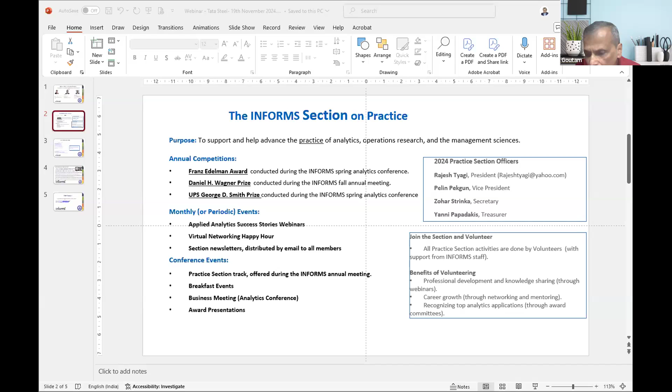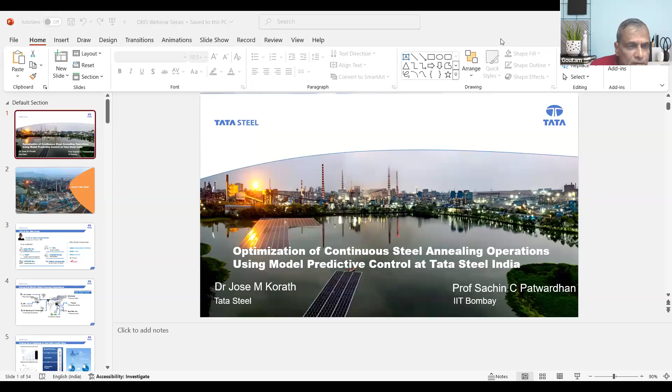Thank you, Professor Datta. So I'm just, yes, I think I can share. So it's not. Yes. Is my screen visible? Yes, screen is visible to me, at least. Yeah, it's visible.

Good evening and good morning, everyone, and welcome to this presentation on optimization of continuous steel annealing operations using model predictive control. With me is I'm Jose Korath from Tata Steel, and with me is Professor Sachin Patwardhan. We'll start with a brief introduction of the Tata Group and Tata Steel and the business context within which we operate. Also, the strategic significance of the automotive steel market segment. Then we'll go to the project details.

About Tata Steel: it is part of the Tata Group, one of the most diversified groups in the world and most well-trusted group, with an annual revenue of about 150 billion US dollars. We have about 30 listed companies and many other non-listed small companies. These are the key group companies: Tata Consultancy, Tata Steel, Tata Motors, Titan, and Air India.

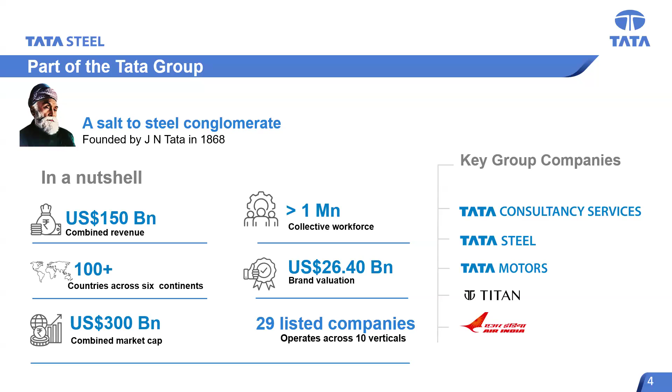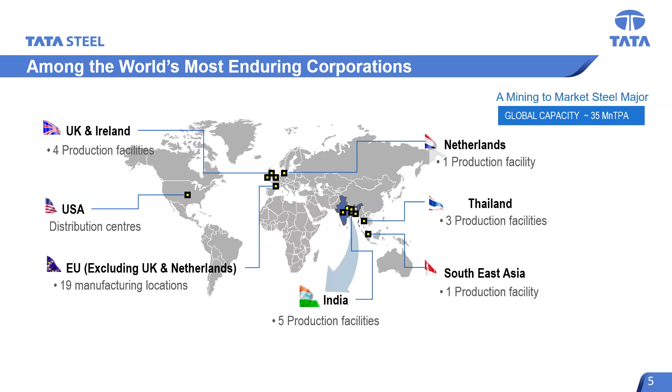Tata Steel is the flagship company of Tata Group, and it was established in 1907 in India. Now we have operations in India, UK, mainland Europe, and the Americas, and also in the Far East in Thailand. In India, we have got 5 integrated steel plant facilities, and we are a mine-to-market steel major, having the entire value chain starting from mining to finished product.

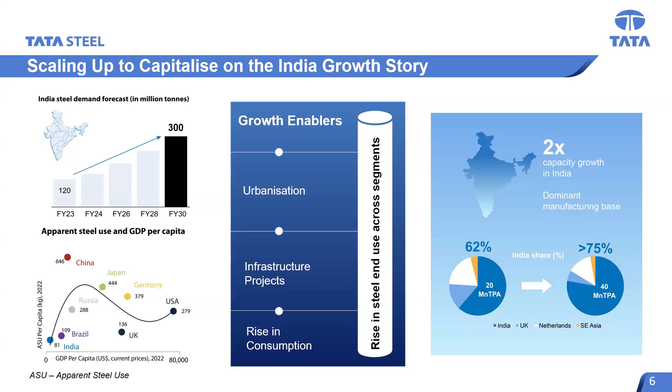If you look at the steel industry in India, as we know, the Indian economy is growing rapidly, and is primarily powered by the growth in infrastructure projects and other aspects of urbanization like automotive, housing, etc. So this is a big opportunity for consumption of steel, and it is estimated that by FY30, the Indian steel demand will double to almost 300 million tons per annum. So Tata Steel is also planning to capitalize on this opportunity, and our plan is to double our capacity in the coming 5 years. By FY30, we'll become 40 million tons in India from the current 20 million tons. That plan is under execution. So that is the overall broad context.

Coming to automotive steel: among the steel market segments, the most premium one is automotive. At the same time, it is the most competitive, with very well established and stringent global standards for its quality and supply chain requirements. Most of the steel used in automotive is cold rolled and annealed. If you take a car, typically 60% of the components are made of cold rolled and annealed steel. So it's needless to say that the quality of the steel is very important for the safety and durability of the car. That is the context in which this project assumes significance.

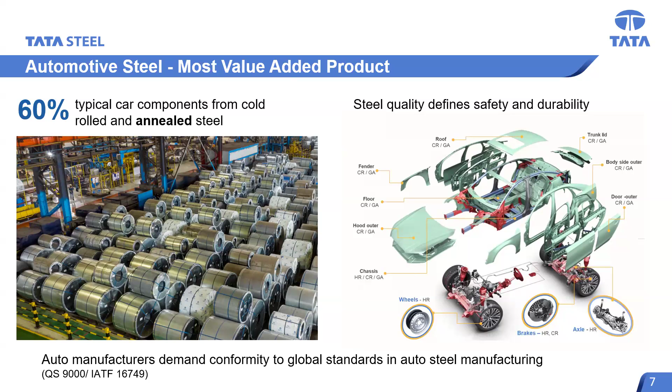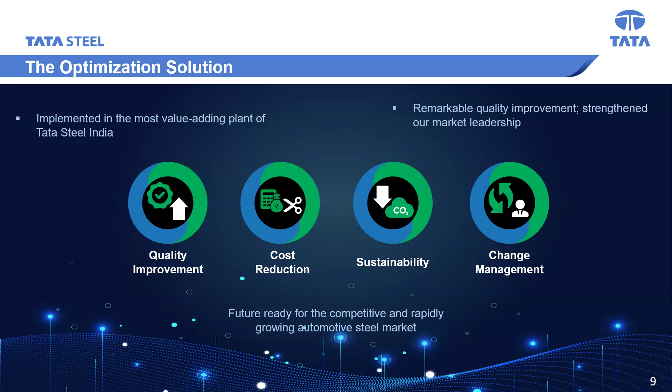So we have tried to optimize the annealing operation in an integrated steel plant. The objective is to get a smart decision-making solution for an annealing line, so that the product comes out with consistent quality in a fuel-efficient, cost-effective manner. This has been implemented in the most value-adding plant of Tata Steel India, and the quality improvement we got is remarkable. It has been a very big, great change management story as well.

So before I get into the project details, to familiarize the audience with the steel manufacturing process, we have prepared a 2.5 minute video. I would request you to go through this.

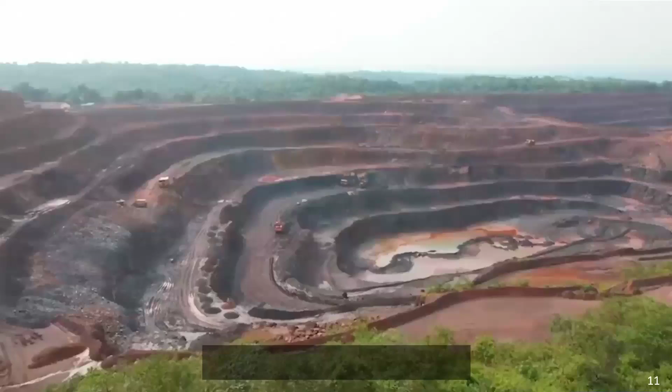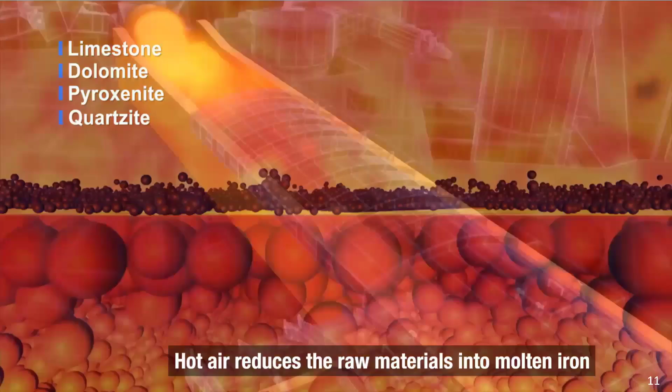Let us understand the various steps in Tata Steel's integrated steel making operations. A mining-to-market steel company, Tata Steel's value chain begins at its captive iron ore and coal mines with the extraction and preparation of iron ore and clean coal. Inbound logistics transports raw materials from different locations to the steel works. Coal is converted into metallurgical coke and iron ore into pellets and sinter before they are charged into blast furnaces. Hot air reduces the raw materials into molten iron, while impurities called slag float to the top.

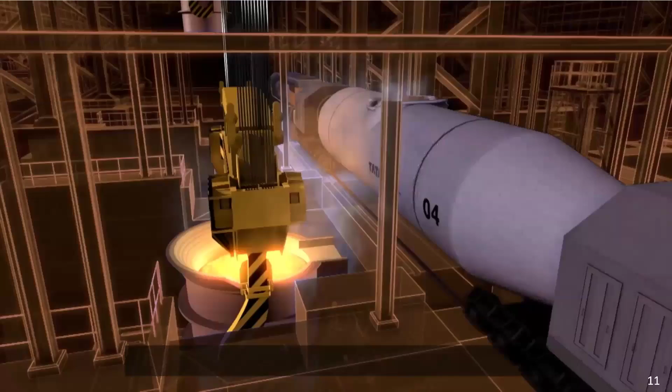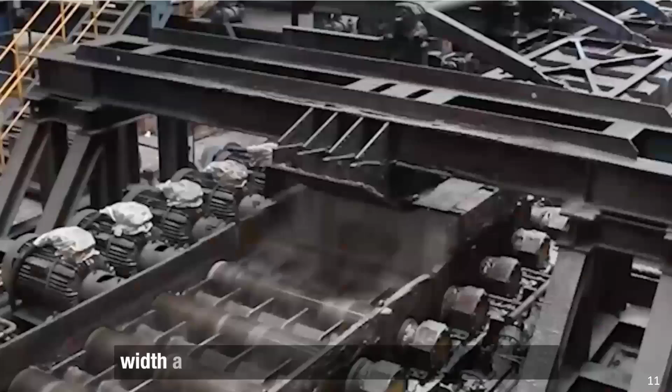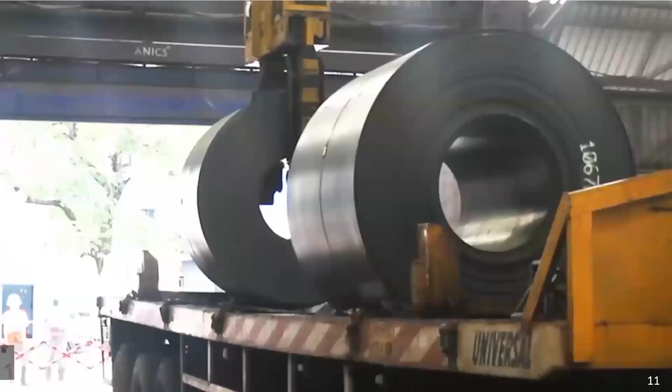The hot metal is collected in a torpedo which transports it to the steel-making shop. Here, it is tipped into a transfer ladle, which carries the hot metal to the steel converter. In the converter vessel, high-purity oxygen is injected via a lance to refine the hot metal into steel. Liquid steel is then transferred for casting into solidified slabs, cut to the required length and sent for hot rolling. After being reheated, the slabs are rolled into the required length, width and thickness as per the production schedule. The hot rolled strip is then passed under laminar cooling to achieve the desired mechanical properties. Thereafter, this strip is further wound into coils of almost 1 kilometer length. It is then strapped and marked for the customer before being sent to the coil yard for dispatch.

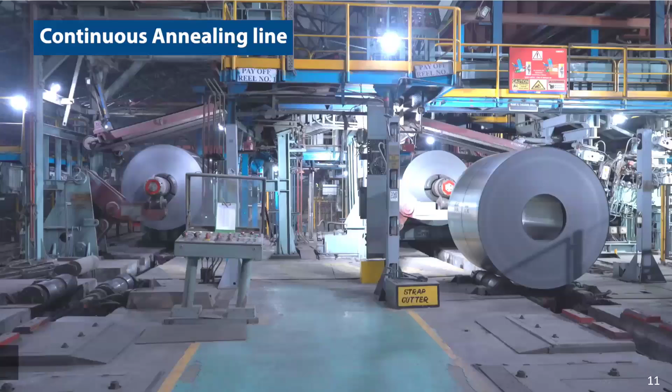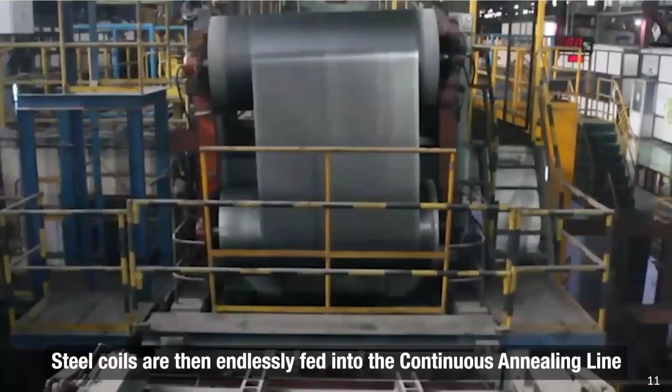Steel for automotive applications is sent to the cold rolling mill for value addition. Here, hot rolled coils are pickled and rolled to create cold rolled sheets, which make the steel hard and brittle. To make automotive steel ductile and formable, it must undergo reheating in a process called annealing. The focus of the current project is on this annealing process. At the continuous annealing line, successive coils are continuously welded to maintain continuity across the line. Steel coils are then endlessly fed into the continuous annealing line. In the annealing furnace, the steel strip is reheated to a target strip temperature to allow the strip to regain mechanical properties that make it ductile and formable.

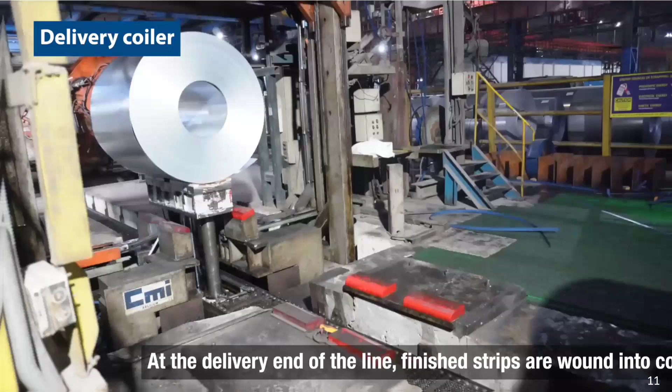After the annealing process, cold rolled sheet is galvanized in a zinc bath to provide protective coating against corrosion and acquire surface finish. Every inch of strip surface is inspected and tested for the desired mechanical properties. At the delivery end of the line, finished strips are wound into coils, packed and strapped with the help of robotic machines. Packed coils are stored in yard and dispatched by road and rail as per production plan.

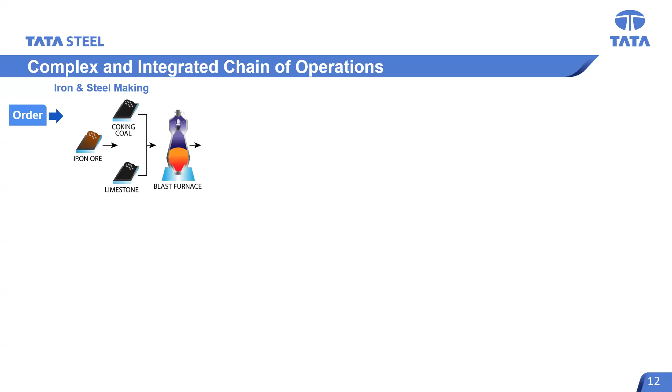As you would have seen in the video clip, the manufacturing supply chain of an integrated steel plant is fairly complex, given the variety in the physical, chemical and thermal processes involved, apart from the enormity of the logistic operation. This slide captures it schematically.

So we have a huge product basket, starting with the same liquid hot metal. We make about 300 grades of steel slabs, and from there about 800 grades of hot rolled products. From that hot rolled coils, some part goes into the market since they find direct application, and the remaining part goes to cold rolling and annealing line. There, in the cold roll and annealing segment itself, we have about 1,100 SKUs.

So with such a macro and micro level complexity in the supply chain, to meet on-time delivery commitment to our customers, we use a very well-established, robust, at the same time flexible framework for production planning through the value chain. We use advanced SCM platforms like BY, etc., to have the production planning. That is the first level of decision making. The second level of decision making needs to happen at individual unit process, whether it is steel making, rolling, casting, or annealing. So that also equally needs to take care of the specificities, the constraints of that particular unit operation.

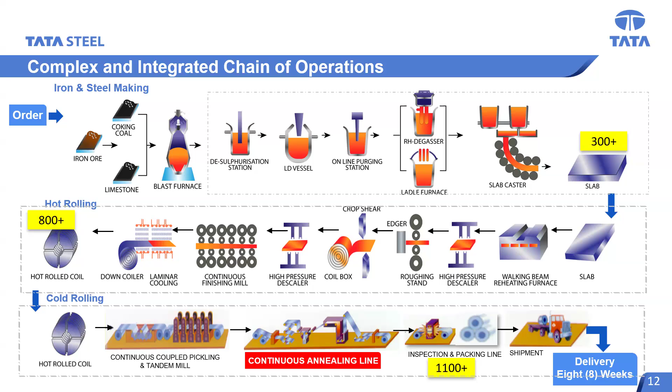Here in this project, we developed an optimization solution for the highly value-adding finishing operation called continuous annealing, which is very critical to quality, especially for the premium automotive steel segment. Let me use a pointer first.

So we'll just go to the problem. So why is annealing required?

When we cold roll the steel, we are reducing the thickness by applying pressure and force. That leads to rupture of the internal grains, the crystals of the steel, and the deformed structure has a lot of internal stresses generated in it, making it brittle. With that brittle steel, we cannot do any forming application or make any shapes by forming operation.

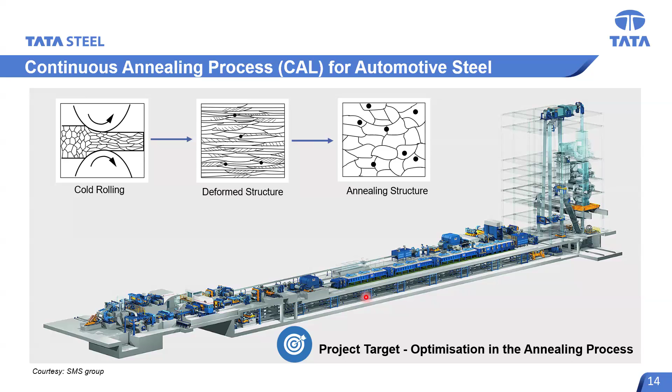So in order to recover the formability or ductility of the steel, we need to subject it to a process called annealing, where recrystallization happens - stress-free equiaxed grains take a kind of rebirth from the deformed structure. This is achieved essentially by heating the steel to a particular target temperature where recrystallization happens. There are many technologies for annealing, like batch annealing, but the most modern one is the continuous annealing line, especially for producing premium steels used for automotive applications.

Now this is a schematic of the continuous annealing line. Typically the CAL consists of a number of unit operations connected and operated in tandem. The steel coils are unwound and fed continuously to the line, one after the other, with the tail of one coil getting welded to the head of the next coil. It passes through a surface cleaning unit first and then enters the furnace where it gets annealed.

It is followed by post-processing like metal coating, which is optional - some lines do not have a zinc coating. Then a single stand rolling which gives a mild elongation, and it gets wound on a winding reel, ready to dispatch.

If you look at this line, there are two things we need to keep in mind. One is the tightly coupled nature of the line - a disturbance in one unit can easily lead to a disturbance in the other, a kind of domino effect. The other aspect is the varying scales of dynamics of different units.

Some units are very quick to react. For example, the rolling mill - if I apply a change in the set point, it will react very quickly. Whereas a unit like the furnace, which has very high thermal inertia, is very slow in response. So this variability in scale poses a challenge in controlling the connected line in a smooth manner.

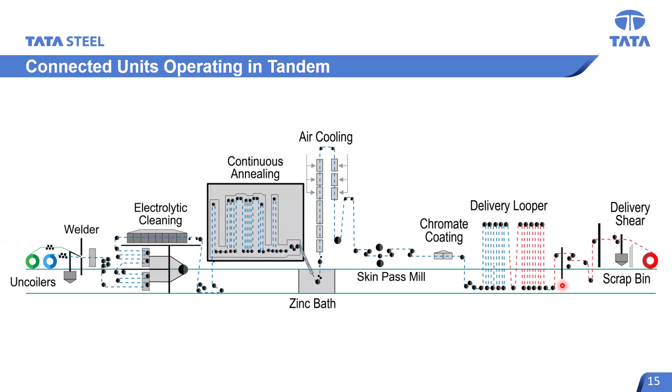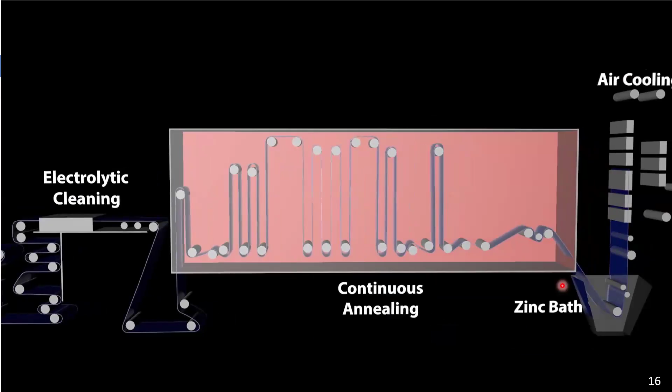Okay, this being a schematic, just to get a feel of how the line looks, it's a small animation we have made. You can see the uncoilers, coils getting unwound and entering the furnace, then the coating line. It goes through different storage buffers and finally gets wound off. This is always in motion - at steady state it will look like this, continuously being fed from the entry side.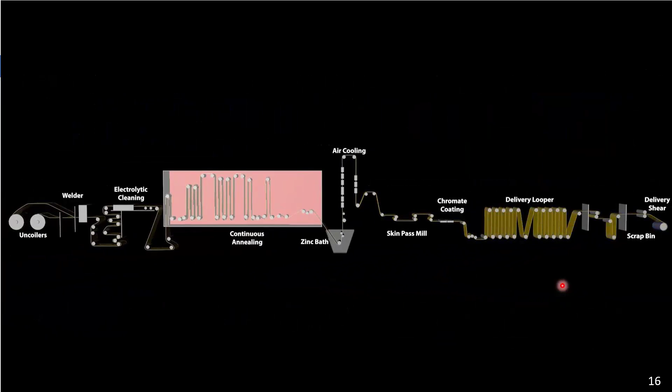So let us have a closer look at the annealing furnace. That is the unit where we are applying our optimization solution. Let's look at the anatomy, the scale and complexity of the furnace.

The furnace is nothing but a rectangular heating chamber with temperatures increasing along the length. A steel strip passes through the furnace, and as it passes through, it gets gradually heated up to a specified target temperature. The basic heating element inside the furnace is the radiant tube, shown here as these red boxes, and it's blown up here too - this is the structure of a radiant tube. The gaseous fuel burns inside this radiant tube, and that in turn heats the radiant tube surface, and the heat radiates from the surface to heat up the furnace ambience, and the strip gets indirectly heated up.

Why do we adopt such a methodology? An open flame will contaminate the steel surface, whereas this method prevents that contamination. So it is an indirect heating.

We have about 150 plus radiant tubes inside the furnace. These radiant tubes are grouped into different zones for the purpose of controlling the furnace temperature profile. By regulating the fuel flow into the radiant tubes in each zone, we can control the temperatures in each furnace zone, which in turn affects the strip temperature. The operator gives the desired temperature set point for each zone, and lower level controllers regulate the fuel flow accordingly.

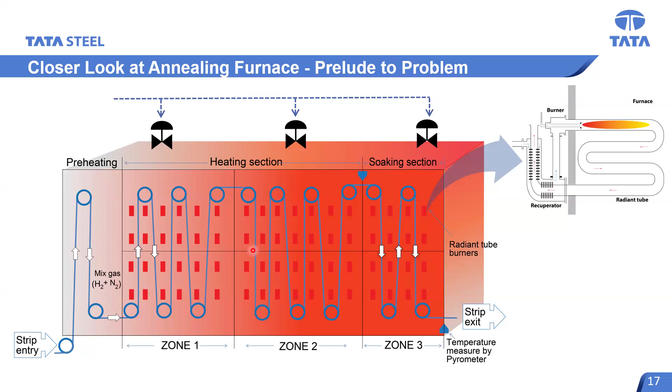Now, where does the suboptimality arise from? The first problem, we saw the slide depicting the complex supply chain. We saw that the wide variety of products we make through the same line means we will have a lot of transitions - coil after coil coming to the annealing line will not be of the same type. Given the delivery requirements, we will have a lot of variation transitions as part of the daily planning. So it's an intrinsic characteristic of the supply chain.

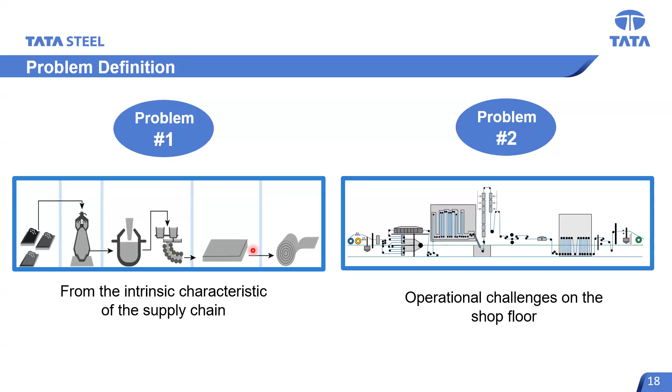The second one is the operational challenges from the shop floor, the plant disturbances. We will have a situation where the leading coil has a target temperature of 800 degrees to be met once it passes through the furnace, whereas the trailing coil has a target temperature of 700 degrees, because that is the temperature demanded by that particular grade for it to achieve recrystallization.

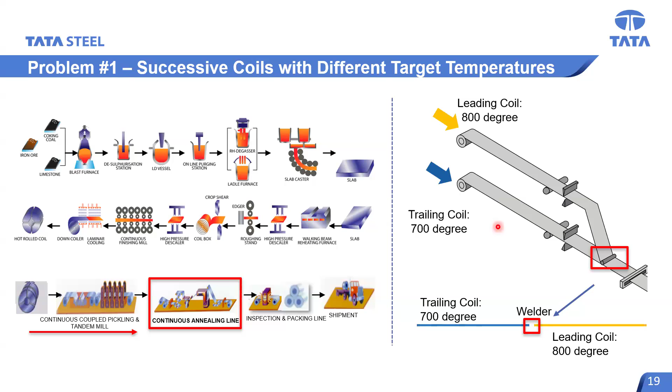So this transition - we need to manage it without over-annealing or under-annealing as they pass through the furnace. This requires dynamic management of the furnace temperature profile so that leading and trailing strips are heated correctly and meet their respective target annealing temperatures with minimal deviation during the transition. Given the furnace inertia, there will be some underheating or overheating, but how well we can minimize it with a smart decision tool - that is the challenge. This just shows how the welding is happening one after the heads and tails.

So this is the other problem. Suppose there was some problem in the welder - the welding, which is supposed to finish in say 30 seconds, took slightly higher time, 45 or 50 seconds. That impact will be felt in the furnace, because we have to stop the line while welding is happening. The coil in the furnace will get overheated. In this kind of scenario, the furnace needs to respond with adjustment of the temperature profile to reject these kinds of disturbances most effectively.

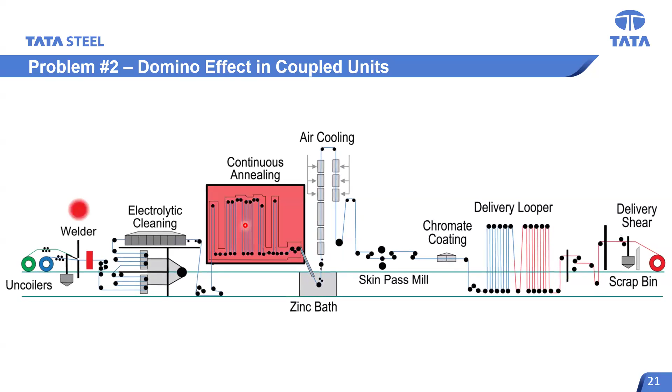For the past 20 years, this has been done by the operator at the desk - his wisdom, his experience, his skill comes into play. Sometimes both grade transition and line disturbance happen together. So it's this legacy practice of adjusting manually that results in suboptimal decisions.

For example, in a typical case, the operator will be responding to different calls from the entry side and exit side, adjusting the set point. So there is a lot of room for getting panicky for an average operator on a daily basis. This legacy practice to handle both problem scenarios mentioned above was to adjust furnace operation set points manually.

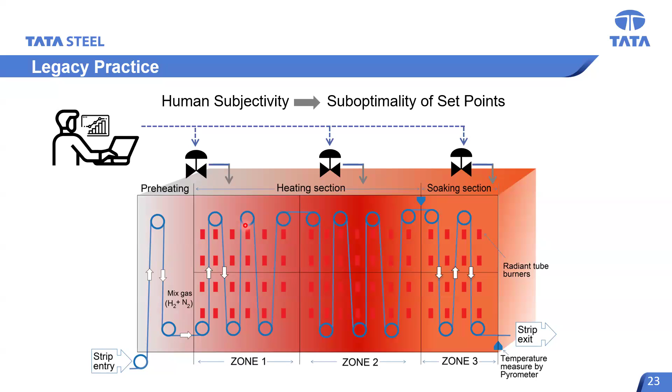So what is the impact of this manual operation? We salvage the scenario, but how severe is this suboptimality? One is improper heating of the strip - either overheating. As the picture shows, the leading coil is 800 and trailing coil is 700, so there is a good chance of overheating the trailing coil, which in turn leads to over-softness and more fuel consumption.

Here it is a case where if I try to reduce that, there is a chance of bringing down the furnace temperature early.

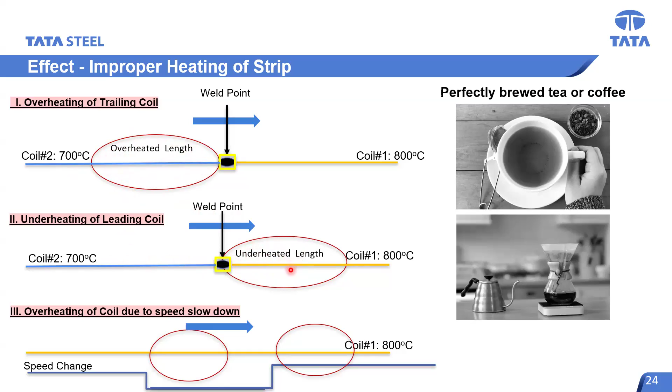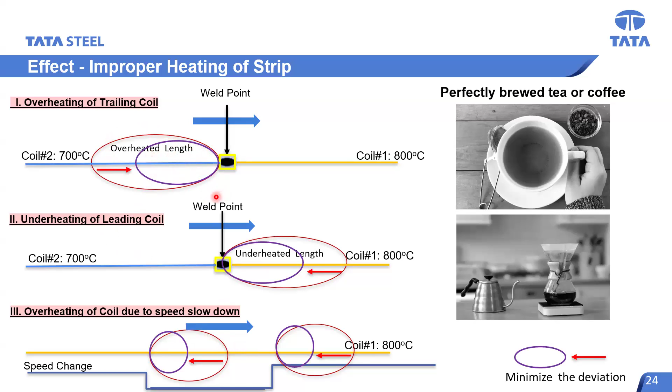There is a chance that the leading coil gets underheated, which will affect its mechanical property. Or if there is a sudden speed reduction, as shown here, this part of the coil may get overheated. So the purpose of the project is to see how much we can reduce this under-annealing or over-annealing, minimizing this deviation. That is the objective of the solution.

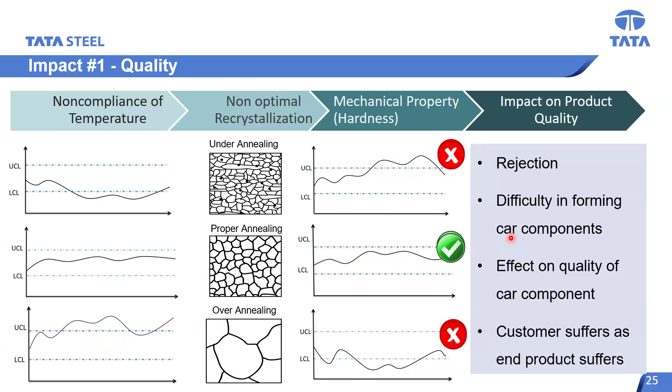So the impact on product quality - either we'll have to reject it, or if it is non-uniform while product application, we will face difficulties. And even if we are able to manage the product forming, while it is in service, it will give trouble.

Here it's illustrated with a sample example. Under-annealed hard metal, when subjected to forming, cracks. An over-annealed soft metal, when subjected to forming, generates a lot of wrinkles. Whereas this one is just optimal - there are no wrinkles, and the intricate shape has been formed very well.

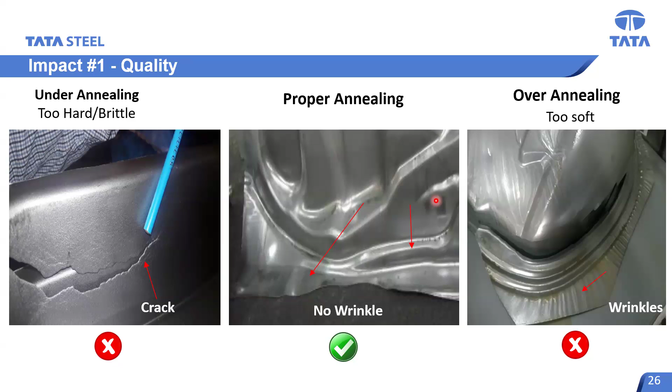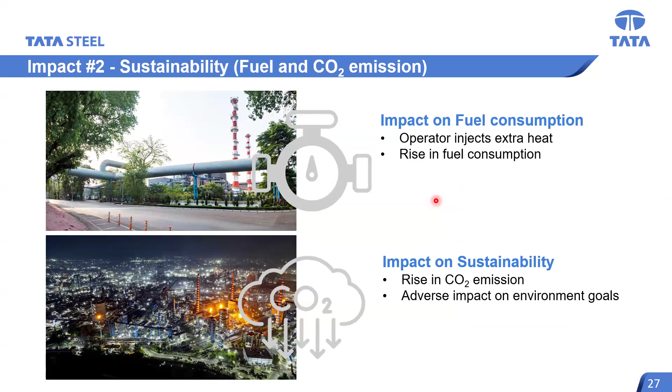A component made of poor quality steel goes into service, and in the unfortunate incident of an accident or something, these components will fail, leading to very disastrous results. Another thing is, whenever this manual operation is done, operators tend to overreact, which invariably results in more fuel consumption and subsequent CO2 emission. These are the two impacts.

So let's hear from the problem we're trying to solve. The problem to solve is that suboptimal decision making should be avoided.

What is the pain that the plant manager has? Let's hear from the chief of the plant and head of operations, Mr. Ajay Jha. On any single day, our continuous annealing line, which has many interconnected units and different dynamics, caters to a production schedule comprising different grades of steel being fed to it continuously.

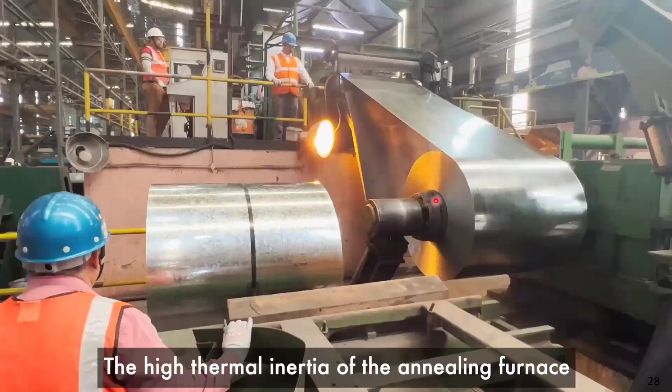In the past, any upstream or downstream disruptions in the line, besides schedule changes in the steel grade of materials, was managed manually or by our highly skilled operators. The high thermal inertia of the annealing furnace made such transition management extremely challenging for them. Among the operating crew, knowledge and skill level vary from operator to operator. This gets reflected in their handling of difficult situations, which are anyhow unavoidable during line operation.

So a solution that can give the most optimal decision under all operating scenarios is what we wanted. That will enable every operator to maintain consistent control of strip temperature and prevent strip quality degradation.

We need a solution which will come out with timely, automated, optimal set point decisions at all times to ensure the furnace operates at peak performance with respect to product quality, yield, and fuel consumption. More importantly, the solution must be able to handle the complexities of a multi-parameter system with a robust mathematical approach and efficient computability for real-time implementation.

So we decided to develop an in-house solution based on model predictive control methodology and roped in IIT Bombay with Professor Patwardhan as our consultant. Now I will request Professor Patwardhan to share the solution strategy. Over to you, Professor - I will change the slides for you. Okay, sure, next slide please.

Here we are trying to illustrate graphically what it means to manage a furnace. Managing a furnace operation is like moving an elephant - there are constraints, like you can't pull it too hard or move it too fast. So an operator changing a set point is often like pulling the elephant in different directions without any coordination.

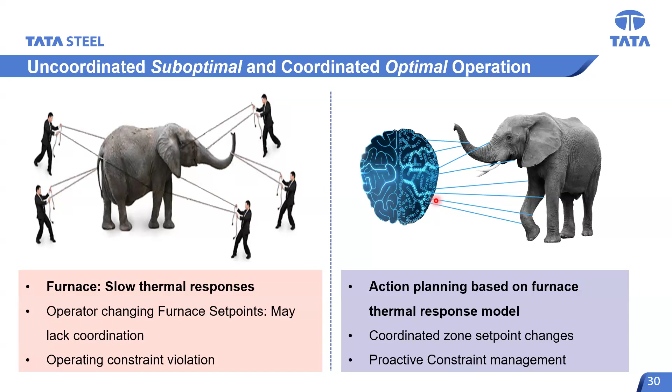The problem is that the furnace has large thermal inertia, and to make optimal decisions, it is necessary to model the relationship between the thermal transients and the set point changes. Also, constraints on the furnace operation need to be honored while orchestrating these maneuvers. So model predictive control is a technology designed to achieve such coordinated transitions under constraints. Next slide please.

Model predictive control is a technology which is by now very mature, about 30 years old. It's being implemented in industry. It's a philosophy which is not very new to us.

If you reflect on how you drive a car, you will realize that you have a model for the transient behavior of the car in your brain. You use this model to forecast the implications of your decisions on changing accelerator, brake, and steering on the future behavior of the car over, say, a horizon of the next 5 seconds. And we continuously keep forecasting. This continuous forecasting over a future horizon forms the basis of our instantaneous decisions to manage lane driving constraints, road condition disturbances, or target route following maneuvering. So we all use this model predictive control without even knowing that we are doing this.

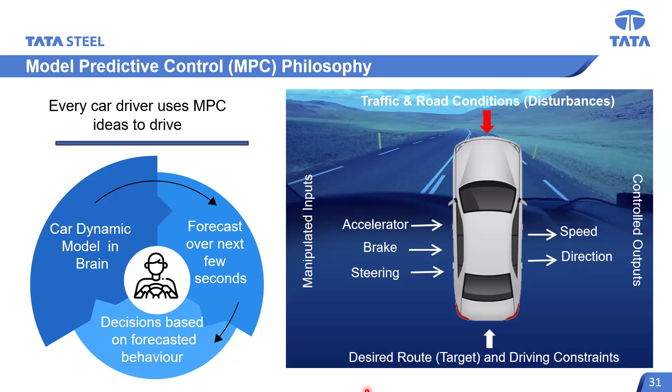So we decided to adopt this MPC philosophy for managing the annealing furnace operation. A furnace transient behavior model relating the zone target set points with the strip temperature was developed and stored in a control computer. This model is used repeatedly online to forecast over a horizon of the next 40 to 60 minutes.

So the model is used to foresee what is going to happen if we make certain actions now, to assess possible consequences of the actions planned to manage the steel grade transitions and reject the disturbances due to steel mass flow rate changes. Now, the target temperature manipulations are chosen optimally such that a desired strip temperature is achieved at the end of the strip while avoiding any possible constraint violations.

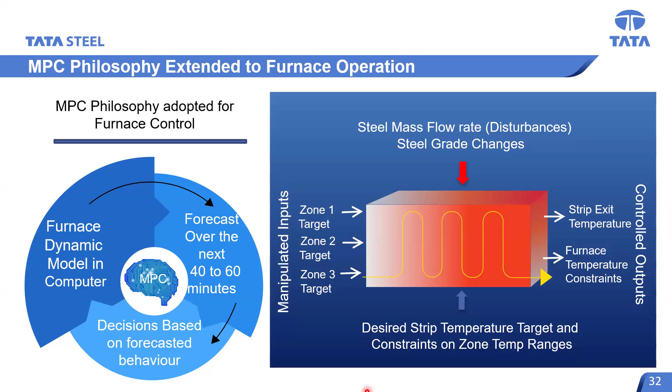So these maneuvers have to be done such that temperature constraints on the furnace are obeyed continuously as it happens. Next slide, please.

So this model is used for actually formulating the control problem. Next slide, please.

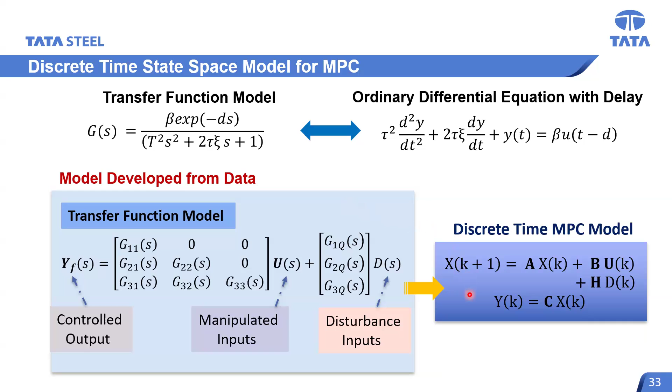Let me give you a flavor of the optimal control that has been implemented here. What we do is solve a series of optimization problems online, one problem every 1 minute. The discrete time model is further used to formulate this optimal control problem over a moving time window in the future. The optimization objective is to minimize the sum of the square of errors between the model predictions and the target strip temperature over a future horizon, and also to penalize the rate of change of future inputs.

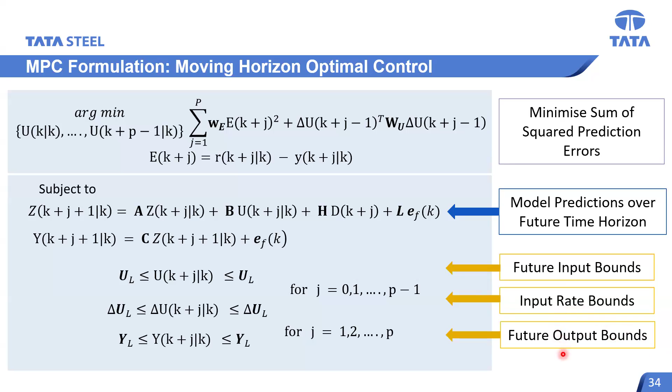So the dynamic prediction model gives rise to equality constraints, shown here, subject to these equality constraints. Future inputs and the rate of change of input are also bounded, so there are bound inputs. This is a classical optimal control problem. And the future predicted outputs are also bounded between certain limits.

On the next slide, we show a graphical representation of what is happening. Here we are at the current point, at the boundary of the past and the future, and we are trying to use the model to forecast the future online. The concept of optimal control using MPC is graphically illustrated in this slide.

When strip temperature is close to the target, a typical operator strategy is to hold the input constant. However, this can result in large deviations from the target temperature and constraint violations into the future. On the other hand, MPC runs an optimization engine to bring the predicted strip temperature as close as possible to the target temperature, such that the predicted radiant tube temperature stays within the safety limits over a future window of the next 60 minutes.

We implement the first optimal set point change for a minute and then repeat the optimization problem at the next sampling instant. This is done in a digital control framework. To achieve optimal operation, one optimization problem is solved every 1 minute.

So this is similar to driving a car using continuous forecasting. Forecasting-based decisions are made every 1 minute, and this runs ad infinitum till we decide to stop the controller.

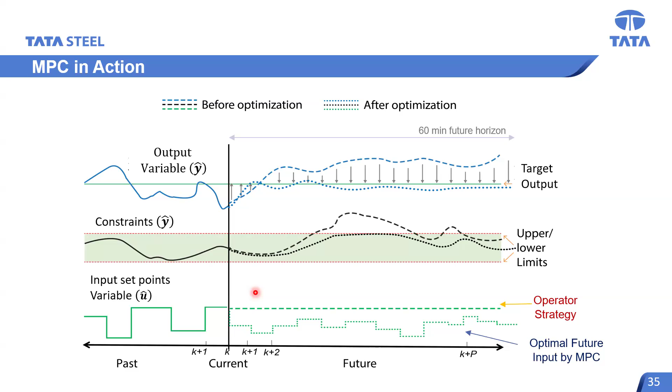Now let me relate it to the economics of the system. Manual control typically results in significant variability. What is shown here, up to 4,000 minutes, is manual control, where you can see a lot of variability. What MPC achieves is significant reduction in the variance of the controlled output.

It is well known that the economic optimum typically lies at the constraint boundaries. This comes from the OR literature. Operators do not take the risk of operating a plant close to the constraint boundary because of the variability. But due to reduction in the output variance, MPC allows shifting of the operation very close to the constraint boundary, thereby realizing the economic benefits. So MPC basically allows you to take the system very close to the economic optimum. That is the advantage of using MPC.

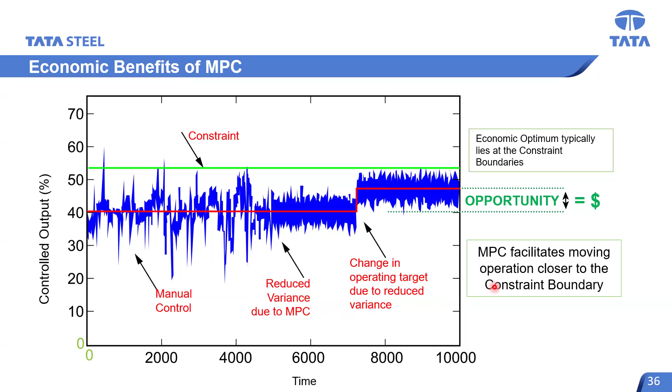So what we had was a plan of action. As an academic partner, my task was to train the Tata Steel team in in-house development and implementation of MPC. These are very, very expensive softwares available from commercial vendors, so Tata Steel decided to do an in-house development. We came up with a game plan. The very first step was pinching, or exciting the furnace, to generate data needed for dynamic model development. These are data-driven models—huge data collected from the past and also by doing experiments.

The models identified from the perturbation data were then used to formulate the MPC schemes. All those transfer function and state space models were obtained from operating data. For the real-time implementation of the optimal control, we transformed it into a quadratic programming problem, and QP problems are known to be very efficiently solved online. Sujit Jagnade, a senior technologist from Tata Steel, was the lead engineer in this project, and he worked under Dr. Korath on implementation of this plan.

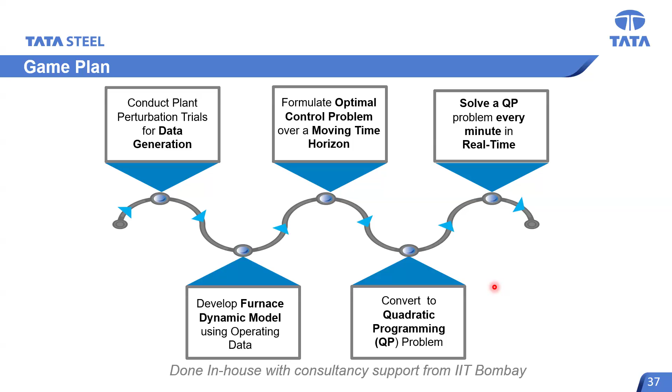So I now request Dr. Korath to continue and tell the story of development and implementation at the plant. Over to you, Dr. Korath.

Thank you. As Professor said, capturing the transient data was an important thing in model development. For that, we purposely perturbed the temperature set points of the furnace—the so-called pinching, the phrase Professor used—and recorded the responses in furnace as well as strip temperature. This had to be done such that the data reveals the correlation between temperatures of different zones and that between strip exit temperature. From a plant operation person's perspective, this had been one of the most challenging aspects of the development journey, as perturbing a running plant in a premium product line is a very difficult proposition.

In this graph, as you can see, we are changing the set points—these red lines—and recording the strip temperature response and the furnace temperature response. This basically tells the furnace set point. Once we change this perturbation signal, the fuel valve will be opened accordingly, and the furnace will get heated up, and subsequently it will be reflected on the strip temperature.

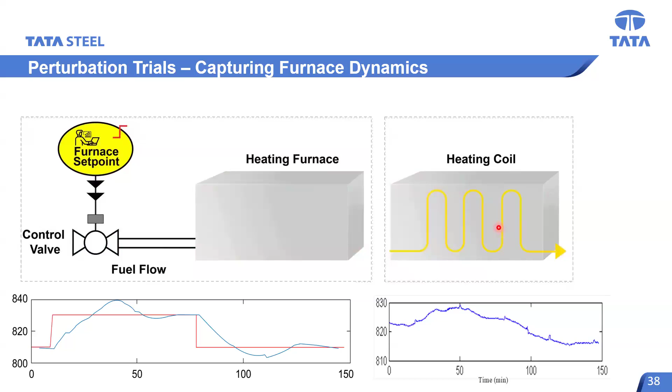So the models—it was a series of models. The first model predicts the furnace temperatures from the set points given; that is model one. From that, the strip temperatures were predicted; this is model two. So it's always a combination of models connecting furnace set points, currently given manually, to the predicted strip temperature. Then through optimization, optimal set points were arrived at. So basically these two models are always invoked sequentially to do the forecast and do the optimization.

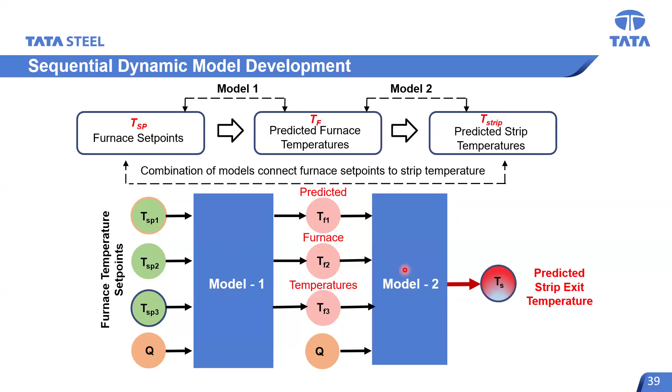As Professor said, we cast it as a constrained optimization problem, cast it as a QP problem, and solved it using an efficient solver.

The point to note is we need to wrap up. I will take another 5 minutes. Give some time to the attendees to ask questions. Take another 5 minutes.

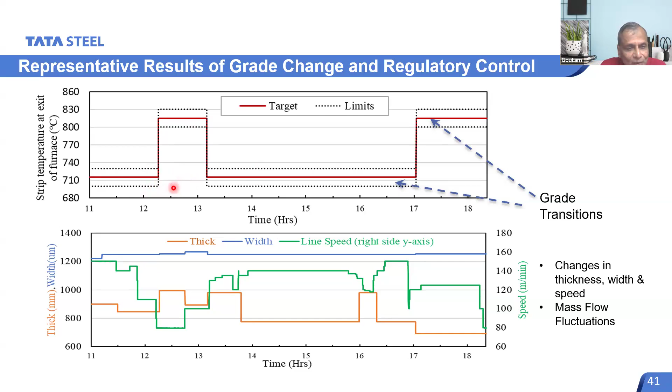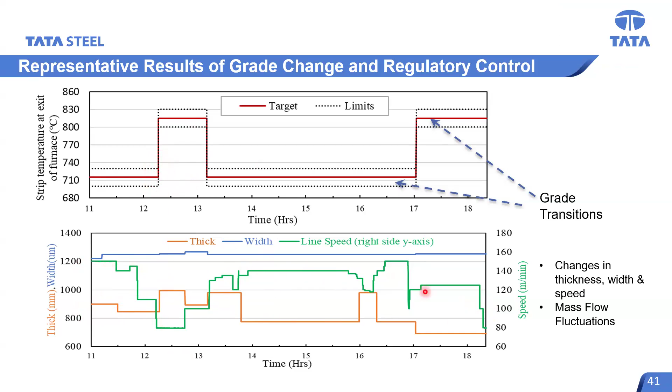There is a demand to change the temperature by 100, 110 degrees over a very short time window. This was also coming along with the thickness change, the mass flow change, thickness and width. The line speed was also changing depending on the dynamic conditions in the plant.

So this is how the system tried to manage it. Since the MPC knows what is the next coil coming up, it started raising the temperature so that this high grade coil reaches its target on time, with some level of overheating of the leading coil. Similarly, as soon as the high temperature target coil passes, it immediately brings back the temperature of the furnace so that the coil with 700 degree centigrade is getting heated properly.

Similarly, here also the set point action is taken well in advance, so that by the time we reach say 5 o'clock in the evening, the furnace is heated up to give the right temperature to the high temperature coil. So this is how the furnace set points are varying.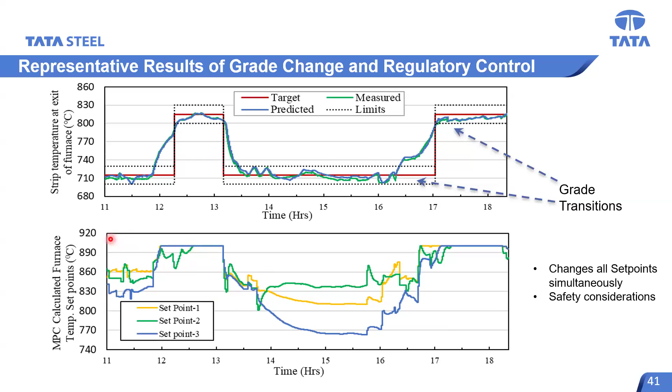You can imagine a manual strategy will never allow us to do this kind of complex tracking and changing. It will always be stepwise changing - operator will change it and leave it for some time. So it will always be suboptimal. Whereas a system-driven, automatic solution is managing it optimally.

Coming to the implementation, of course this we are implementing on top of a control system which is running there already. So the integration with the legacy system was very demanding. We need the interface to be properly taken care of, the safety requirements and safety limits should be taken care of, and the engagement of the OEM of the legacy system was important, along with performance compatibility.

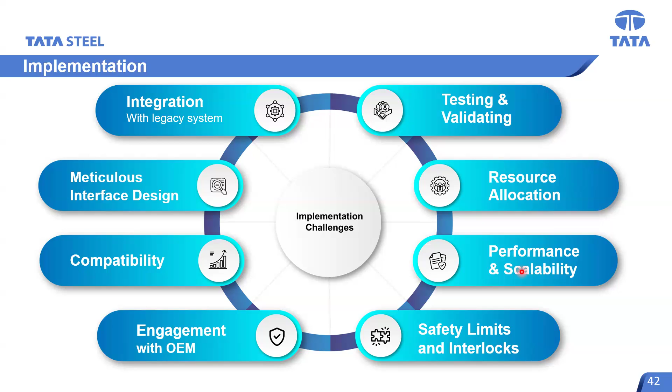Even if the MPC system is able to compute fast, how fast the underlying, below-layer system will be able to respond - these were some considerations.

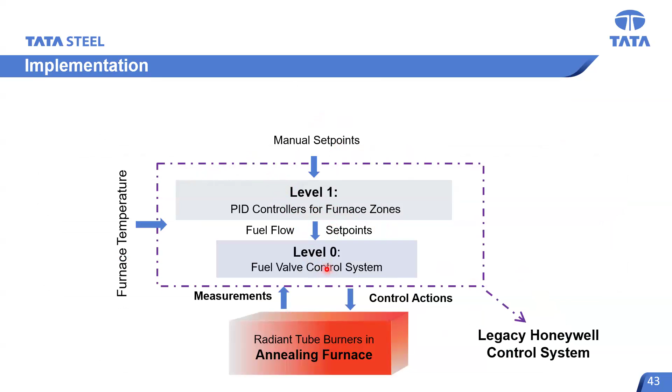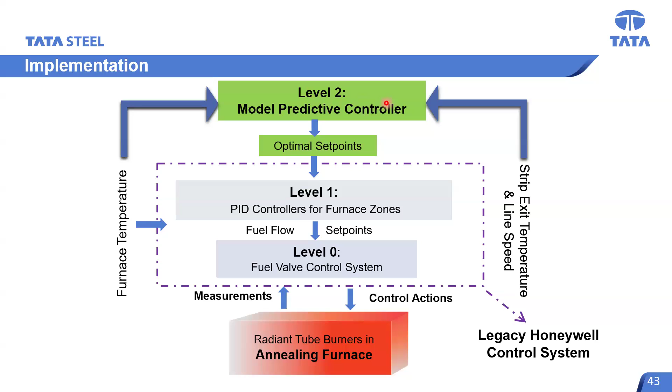If you look at currently, this is the automation architecture. The manual set points are given, the PID controllers change the valve fuel flow rate through the valve control. What we have done is put an MPC layer on another computer. Here the optimization runs, and the set points are given - instead of manually giving, set points are flowing to the PLC from this level 2 computer. The legacy system was a Honeywell system.

So the other important aspect was change management. As I said in the beginning, for the past 22 years people were operating this line manually. So introducing a new solution into the system would naturally face some resistance. We tackled it in two ways.

One is strategically - the MPC could have given the fuel flow rate directly and controlled the furnace. But we decided not to give the fuel flow rate, and rather calculate the set point and give it to the PLC system, because that is what the operator had been doing. He gives the set point and knows how the furnace behaves. So when the MPC solution gives the set points, the operator will be able to calibrate how good or bad it is, whether it is as per his expectation, so that acceptability will be more. That was one of the decisions we took - we will give the set points rather than directly controlling the fuel flow.

The other thing was, whenever we introduce a new solution in a running plant, people often tend to introduce a new system, a new computer, a new monitor, a new screen to look at, and people are resistant to that. So what we did was modify the existing control system's UI with the help of the OEM supplier, so that it could be used more easily.

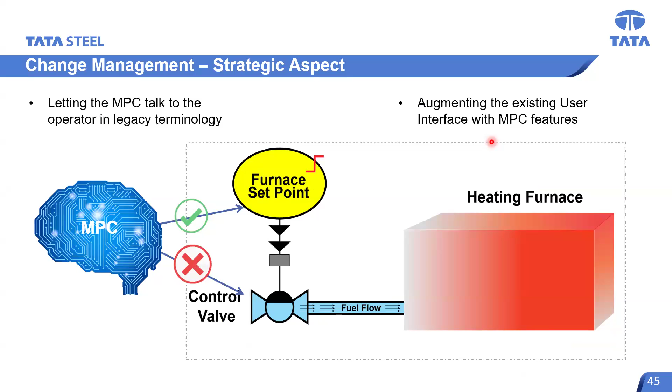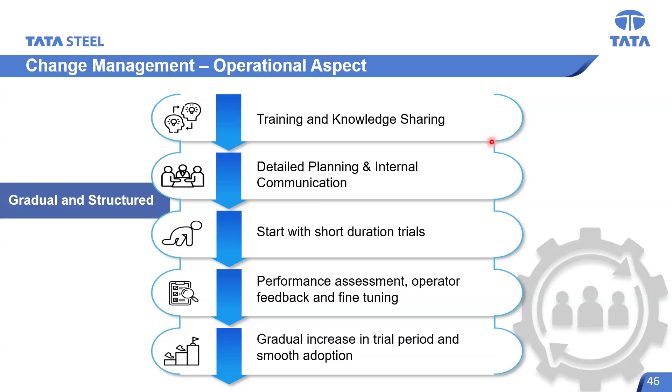So these two things helped us manage the change well. After this, we started the trial first for a few minutes, then a few hours, a few coils, then one shift, then a few shifts. Gradually we increased it and took feedback from the plant operating team, incorporated their suggestions, and did the necessary fine tuning. By end of December 2022, beginning of January 2023, MPC had become the normal, default operation mode.

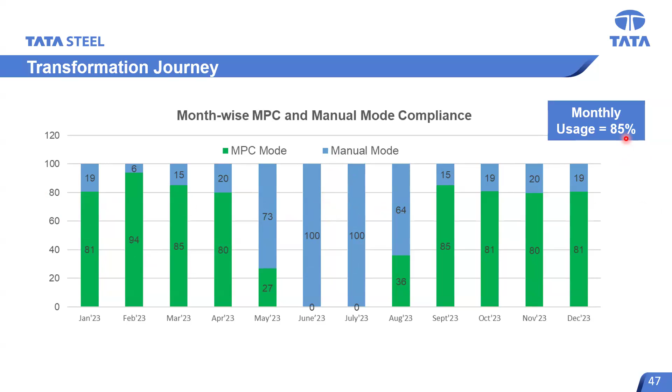You will see here, for these two months there was a line shutdown for a major revamp, so that is why you don't see usage here. Otherwise, on average it is used 85%, or in some months it goes up to 95% usage. This shows how the operator previously used to give the set points; now the MPC solution is giving the set points. So it's a closed loop control — there is no open loop here.

So let's hear from the operating people. It's about a few seconds.

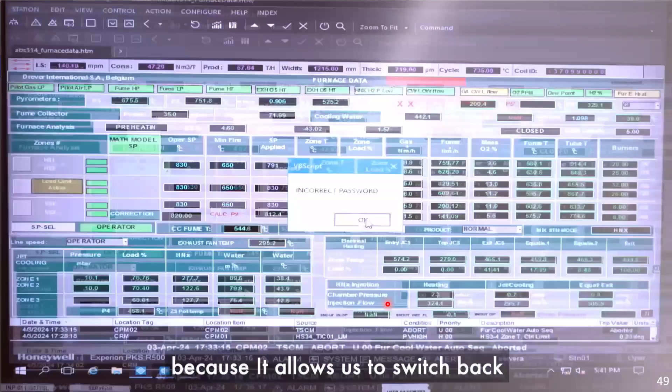Since the solution has been integrated into our existing user interface, our attention is not divided across additional screens. Adoption of this solution has made operations much easier because it allows us to switch back to manual mode when required. We are able to monitor multiple processes with much greater ease since the most critical process is being taken care of by the MPC solution.

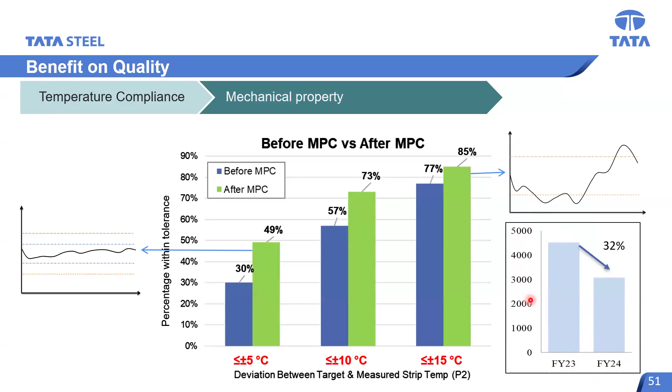The second thing is a consistent improvement in fuel efficiency — there is an 8% reduction in fuel usage, and a similar effect on CO2 emissions.

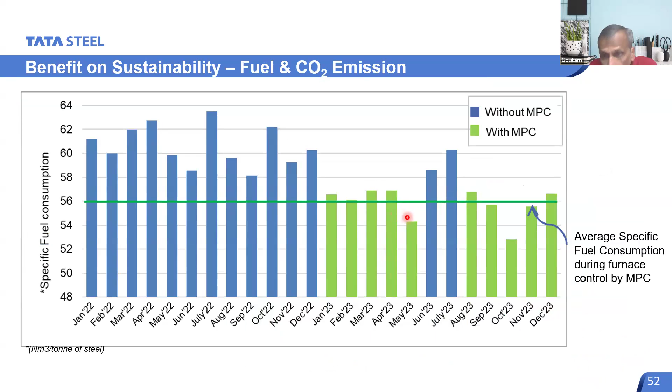Now, one important aspect of why we decided to take this on ourselves was that once we master this technology and methodology, we can apply it to other plants, other processes within steel manufacturing. The second thing is retaining our share of the business in the growing market.

There is extreme competition in the steel market, the automotive steel market. So we are setting up new plants, and our existing plant efficiency and quality also need to be improved. We have two more plants coming up at our Kalinganagar facility, and this solution will be going there too. So this is the last slide.

A few seconds of comment from our Vice President, Steel Manufacturing, Mr. Chaitanya Bhanu: It is challenging to manage any continuous manufacturing line with its inherent complexities.

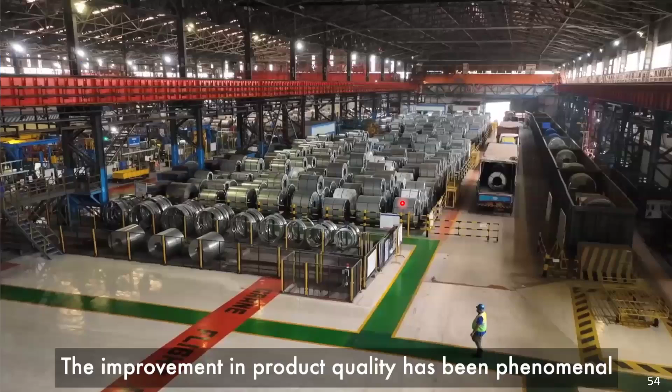In the annealing line, the dynamic operating environment makes it even more difficult. The operational research-based approach has given us an ideal real-time optimization solution. This is a great change management success story. The improvement in product quality has been phenomenal, with product volumes within the premium band growing by over 30%. Fuel consumption and CO2 emissions have reduced by 8% for every ton of steel processed from this line.

So I'd like to acknowledge some of the colleagues. Mr. Sujit Jagnade had been our lead engineer, technical lead in the project. Mr. Aru and Mr. Sai had been from the line operation team. Senior management, Mr. Ajay Jha and Anil, chief of CRM complex, cold rolling mill complex, and Mr. Anil Pujari, chief of flat product manufacturing. There had been a lot of facilitation and encouragement and support from the senior management, that we must say. And Mr. Kunal Kumar from the research team of Professor Raghunathan in IIT Bombay. So I'd like to give acknowledgements to them. Thank you, that's all from my side.